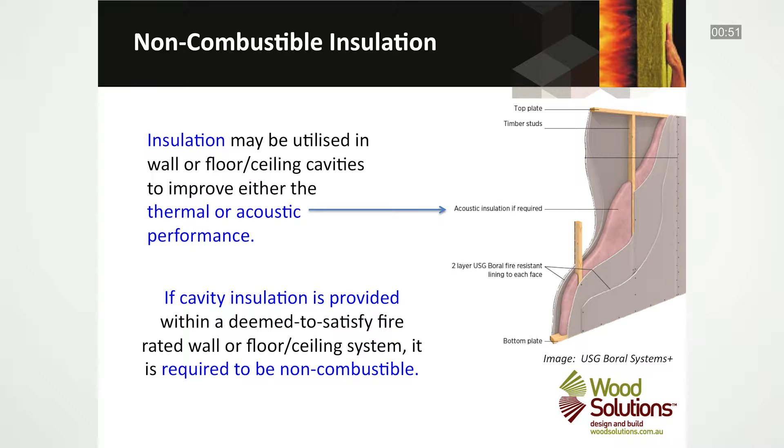Insulation is commonly utilised in wall or floor ceiling cavities to improve the acoustic performance of the different systems, and in colder or hot climates to improve thermal performance. When cavity insulation is used within a deemed to satisfy fire-rated wall and or floor element, then there is a requirement that it be non-combustible. If a combustible cavity insulation were to be used, and in the low probability event of the fire-grade plasterboard being breached, then this combustible material could facilitate the ignition of cavity fires and the rapid spread of fire through cavities. This is definitely an unacceptable situation.

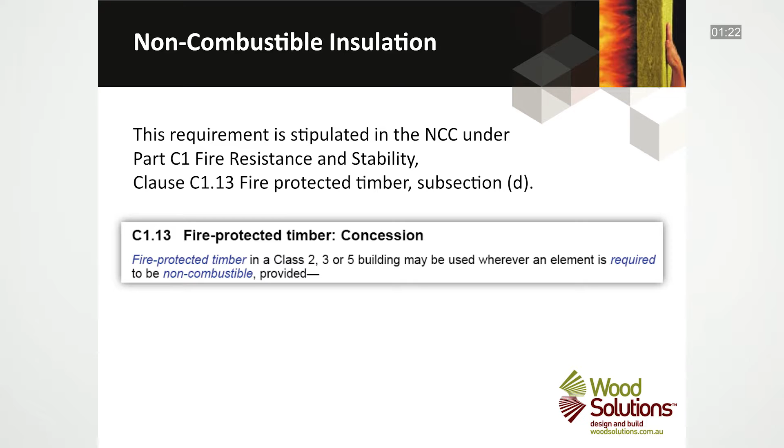Accordingly, the NCC stipulates under Part C1 Fire Resistance and Stability, Clause C1.13 Fire Protected Timber subsection D, that for fire protected timber, any insulation installed in the cavity of a timber building element required to have an FRL has to be non-combustible.

There are a wide range of insulation products available in the market that are made from different materials. These include cellulose insulation, which can be made using 70 to 80% recycled paper. By its nature, these products are naturally flammable. Polyester insulation, which is manufactured out of polyester fibres, including recycled plastic bottles. It is generally not affected by moisture, nor does it shrink. Fiberglass or glass wool, which is made up from 70% recycled glass. The raw materials, glass and sand, are melted at temperatures around 1500 degrees Celsius. It is one of the most popular insulation materials, being easy to install, cheap, and one of the most resistant materials to fire.

And mineral wool, or rock wool as it is often called, which is made from volcanic rock melted at high temperatures and spun into a mat or batt of fine fibres. It typically only burns at high temperatures, often in excess of 850 degrees Celsius, and acts as a fire barrier for roofs, walls or floors. Typically, the flammability of an insulation product depends on the level of organic content, with inorganic materials generally less flammable.

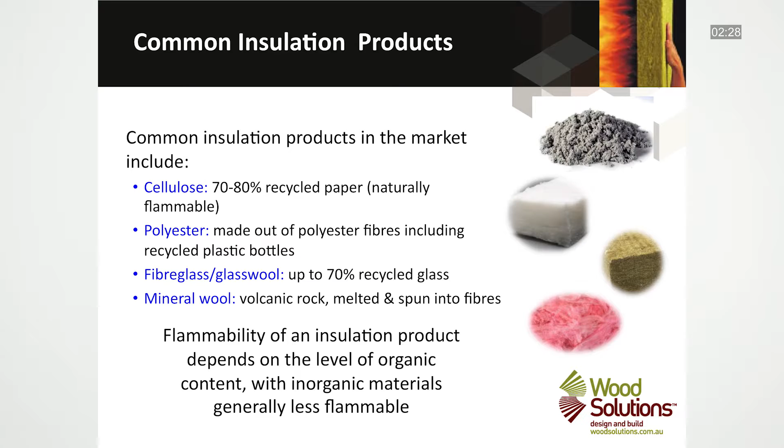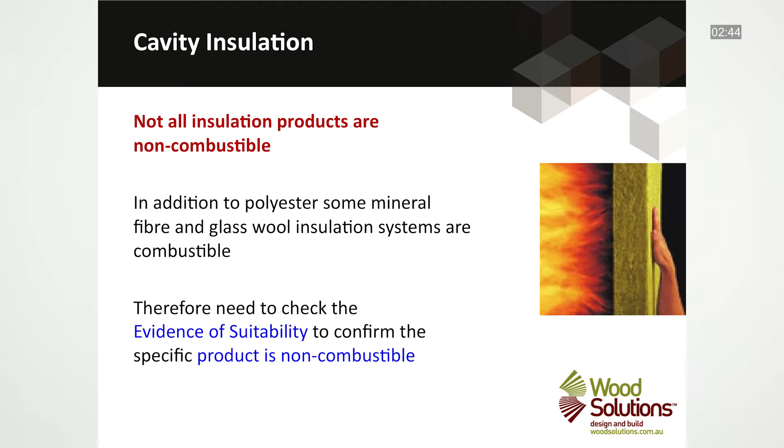It needs to be clearly noted that not all insulation products are non-combustible. In addition to polyester, some mineral fibre and glass wool insulation systems are combustible. Therefore, the evidence of suitability of each product needs to be checked to confirm that the specific product is non-combustible and suitable for use. Typical solutions for non-combustible insulation include mineral fibre or glass wool insulation with very low organic binder contents, typically around 5 to 10% by mass.

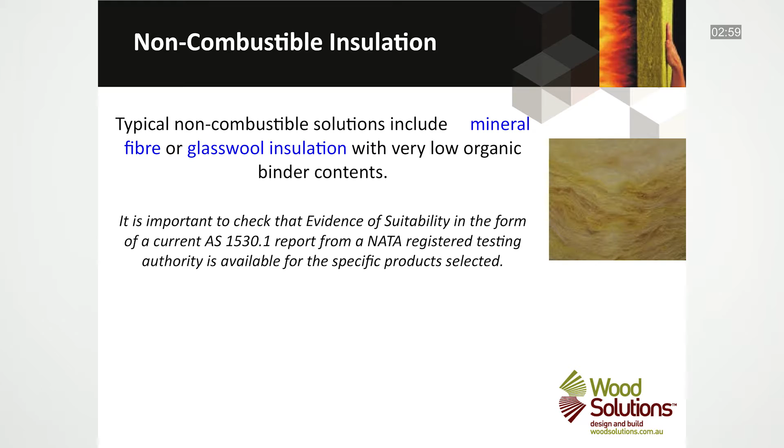It is also important that any products utilised have been compliance tested to AS 1530.1 and that evidence of suitability in the form of a current report from a NATA registered testing authority is available. Product manufacturers will be able to supply this information. Particular care also needs to be taken around product substitution. It needs to be clearly noted that products which only have international test method certificates, which are not called up in the NCC, are not appropriate.

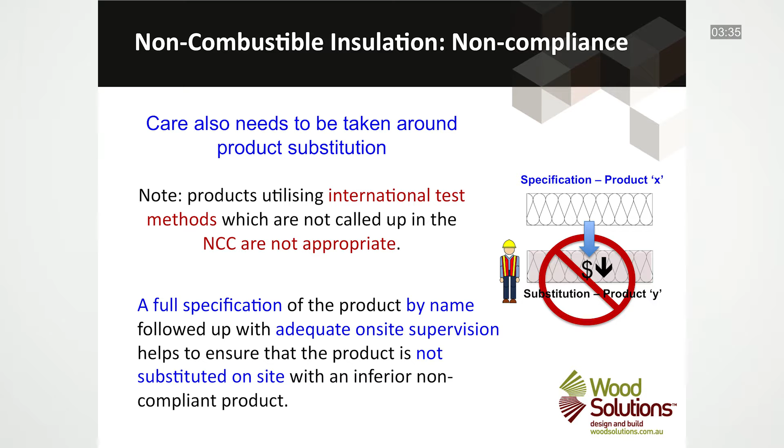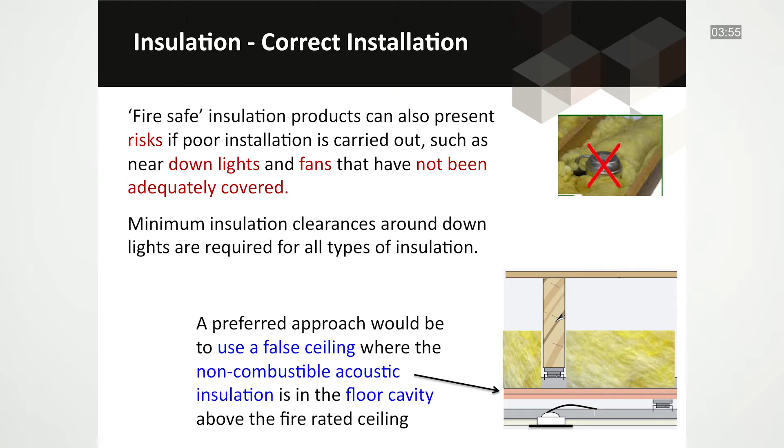To help ensure that a product is not substituted on site with an inferior non-compliant product, a full specification of the product should be provided, clearly stating the product's name and identification marking, and then this needs to be followed up with adequate on-site supervision. Correct installation is also very important, particularly where downlights or electrical fans might be involved. Minimum insulation clearances around downlights are required for all types of insulation. A preferred approach, as illustrated here, would be to use a false ceiling, where the non-combustible acoustic insulation is placed in the floor cavity, above the fire-rated ceiling and away from downlights and fans.

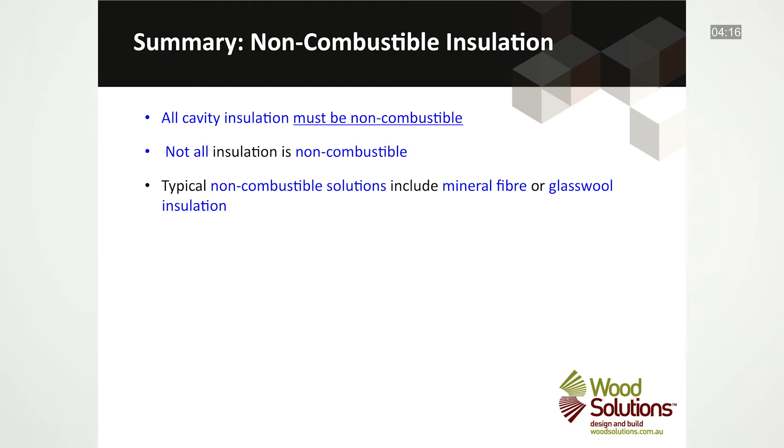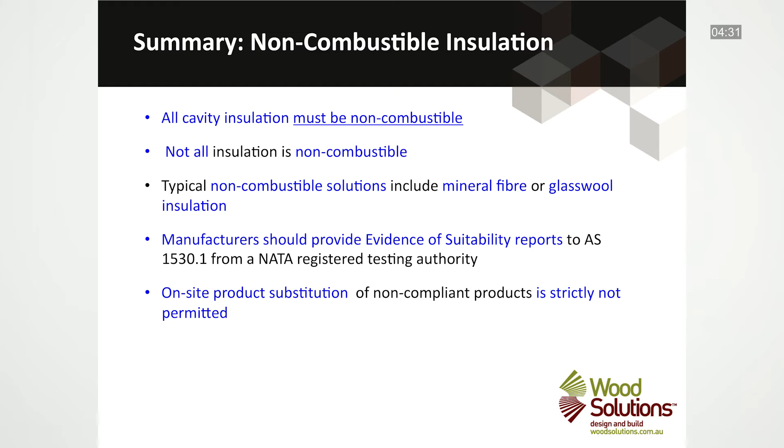So in summary, all cavity insulation in mid-rise timber buildings under the DTS provisions must be non-combustible. It needs, though, to be clearly noted that not all insulation is non-combustible. Typical non-combustible solutions include mineral fibre or glass wool insulation. Manufacturers should provide evidence of suitability reports to AS 1530.1 from a NATA registered testing authority for their respective products. It must be clearly stressed that on-site product substitution that might lead to the use of non-compliant products is strictly not permitted. Any questions on product suitability need to be referred to the responsible project design team member for consideration and authorisation.

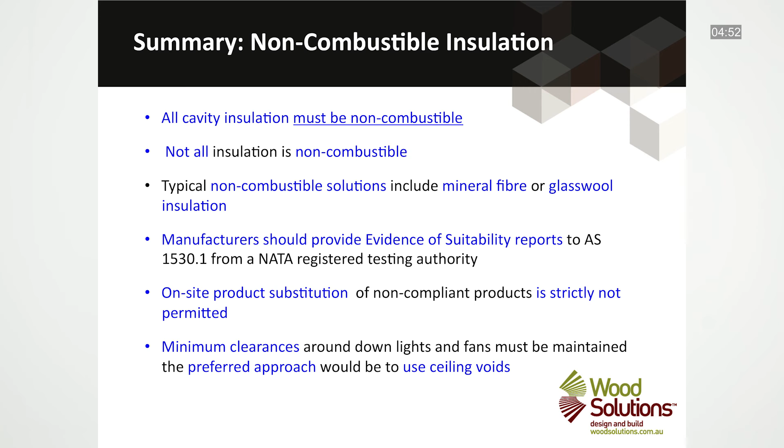Finally, when floor ceiling system insulation is used, minimum clearances must be maintained around downlights and fans. The preferred approach, however, would be the use of a false ceiling, where the non-combustible insulation could be placed in the floor cavity, above the fire-rated ceiling and away from downlights and fans.